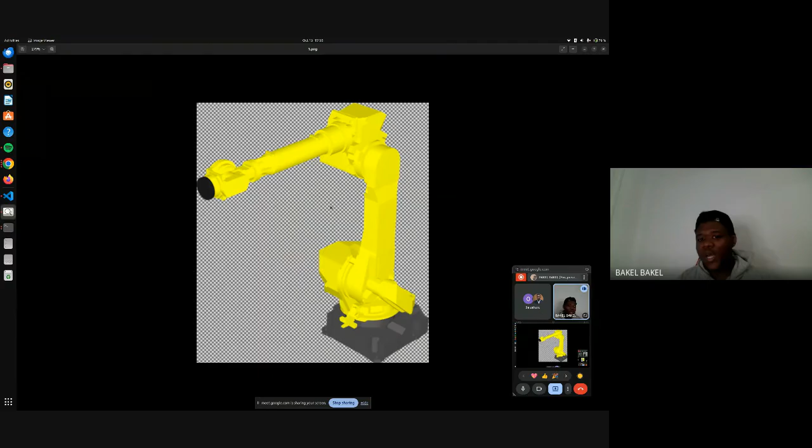And then in the final results, we have two things to guide us. We have this picture where we have what it looks like. Then we also have this particular picture. With this, you can have a rough idea of where what goes, right?

Yeah, what's up, Samuel? I want to ask, are those links usually named link 1, or could they be named something else? Okay, so let's look at the conventions. This one was named finger, hand, link 0, link 1 through link 7. This was named arm link, base link, forearm link, lower wrist, shoulder, upper wrist link. This is exactly how they named it. This was link 0, link 1, link 2.

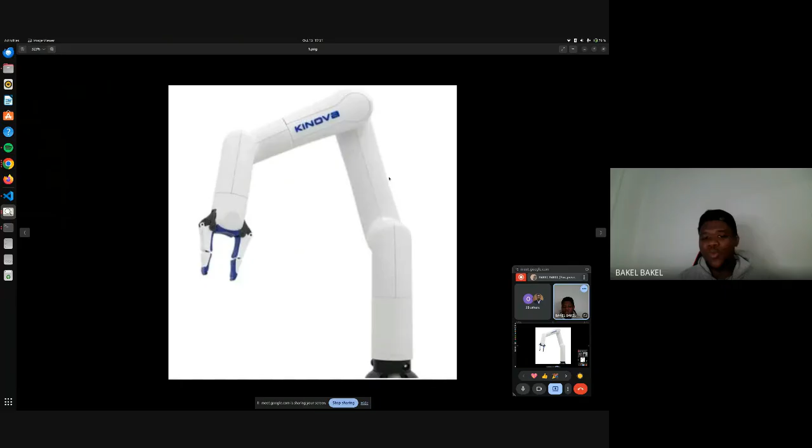But either way, provided it's a robotic arm, it's easy to use your intuition to know where what goes. In the event that you do not know, there's always the final result. They designed it, they know what it's supposed to look like. So you would look at the final results, look at what link you are working with, and then you can tell where what goes. At this point, it's more like putting the puzzle together. But again, that's what makes it fun.

So you see this link here, this link here, and then you probably see this one. And then you now have this guy. So it's left for you to figure out how they actually come together. And the funny thing is, that figuring out is usually part of the problem. Already, if I zoom this part, you can see that this point up here is this one. You can see this arm here.

Now, just on a bit. Now, why am I not using the proper CAD software? Again, I only use CAD on gunpoint. So there's somebody on this group that likes the CAD part of robotics. No, that's not what we do. We either do software or hardware. We don't do CAD. So, do I have CAD software? Yes. At times you might have to do some CAD.

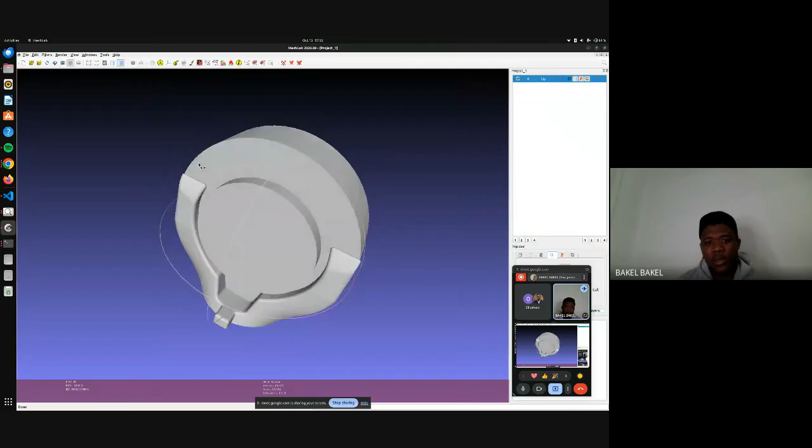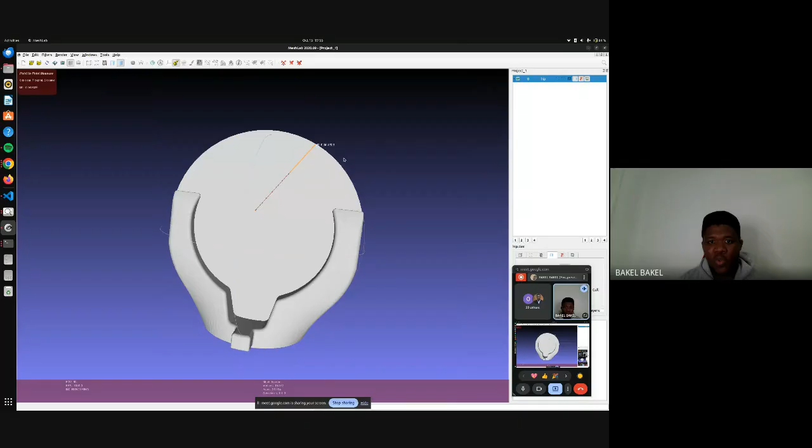It's not like I need this for anything, but as we go on, you would find out that at times you might want to make measurements, to know where what is. It's something you would settle into as time goes on. You would want to measure from maybe this point to this point and know what the measurement is reading. There are different reasons you might want to measure, but I will show you why you would need to measure at some point.

Yeah, the measurement even shows here. That's why I like the terminal open, because almost everything you do in the GUI shows on the terminal. There's some Chinese in it. Okay, that's extra stuff. Now let me put this in the part here. Okay, so what tools should you have beforehand?

If you have SolidWorks, perfect. You don't need to get SolidWorks. I don't have SolidWorks on this PC, so I use MeshLab. And how do you get MeshLab? sudo apt install meshlab. You can choose to put -y, that's optional. sudo apt install meshlab should do the trick for you. And I would probably want to bash this. What tools should I use? Number 1, MeshLab. Number 2, yeah. So just bash this.

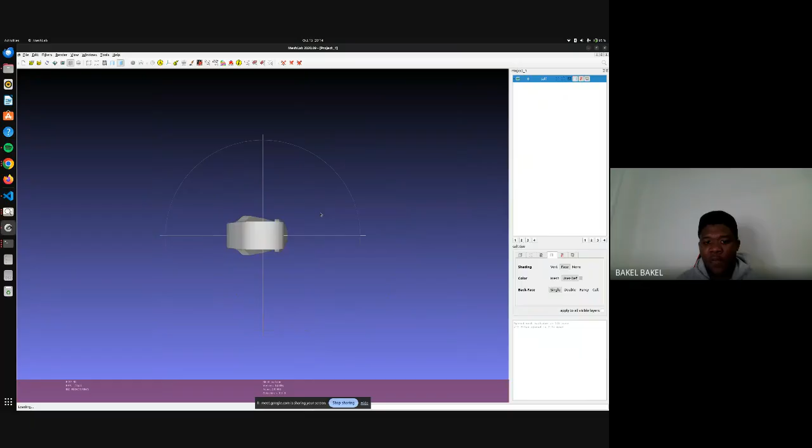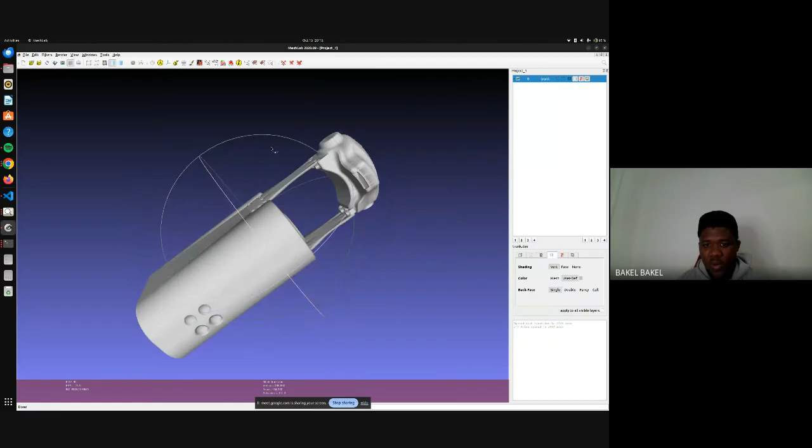You can see what I'm doing, I'm just looking around, seeing what it looks like. This is the trunk. As you can see, all this was already done by the CAD guy, and they stripped away everything. There are no electrical components because we don't need them. We can simulate every single thing, like motors. All we need is what it looks like.

Yours will not be with the dog, yours will be with the robotic arm. The problem is if I solve one robotic arm, the other robotic arm becomes easier for everybody to solve. So just try and adapt what I'm doing. Okay, so you inspect your mesh just to get an idea of what they look like. Now, if for any reason you want to tamper with the mesh, feel free. I won't stop you.

Now, the next one, please write the code for checking the mesh. The code for checking the mesh depends on what you're using. I'm using MeshLab, so if you want to use MeshLab, you must make sure you've installed it. Let me go to 7. If you want to use MeshLab, this is what you do: you install MeshLab, and then you do meshlab link.dae.

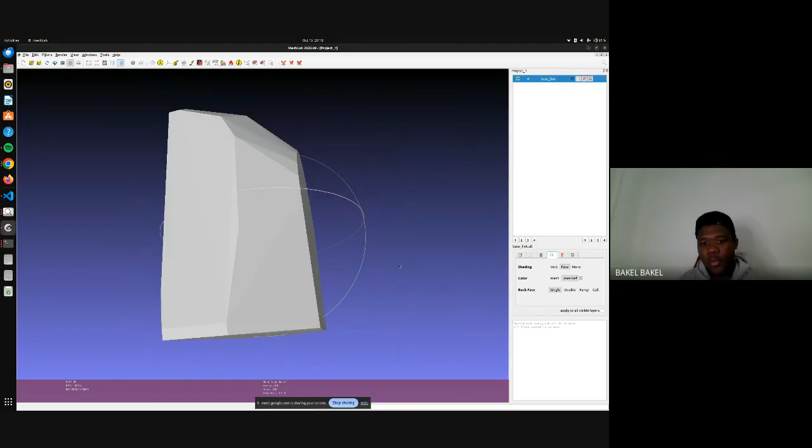So yeah, meshlab link.dae, or it could be link.stl, whatever. Okay, so the eighth one is you've inspected.

I once inspected an STL that took 5 minutes to open, and I sent it back. They have to actually reduce it. I can reduce it, but the reward for good work done is more work, and I wasn't being paid for that. They have a CAD guy that can do that, so I just sent it back.

Yeah, that's something you need to know about work culture. If you are good at something, you don't do it for free. But I mean, there are times you do it for free. But if you are good at something, you draw boundaries. Else, they will overwork you, and it's everywhere. It's every single place, and it's something I suffered a lot. So I decided, nah, I'm not suffering that again. So I just send it back.

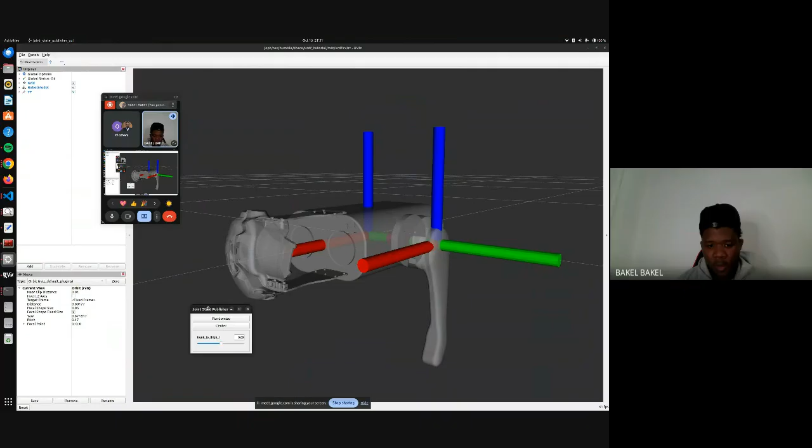And what do we now do? Well, we now run it and hope it works. It should work if I've not skipped anything. Okay, it works. And now you see you have 2 axes, right? Let me make it bigger. So we have this, and now we have our controller here, and we can move it because we made it revolute, not fixed, so we can move it actually.

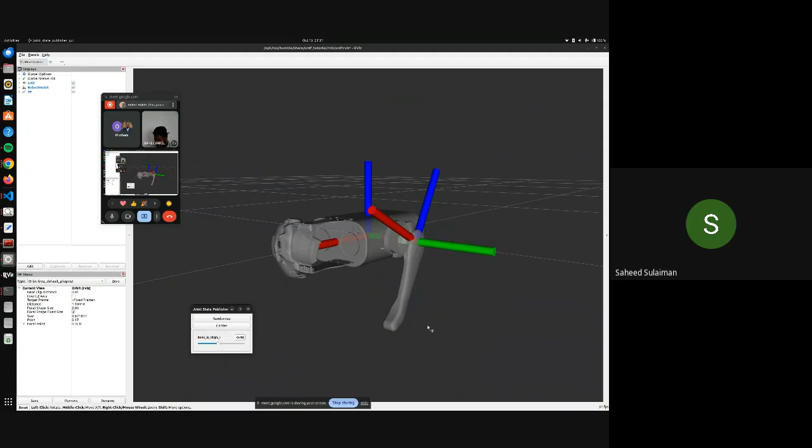And then, sorry, what's up? So did you create a launch file to launch this, or how are we going to launch it? You know about launch files. I could create a launch file, but I'd rather not, because there's already a launch file I can use. There's a launch file in URDF tutorial. Remember, this is the command we're using to launch it.

Let me show you something. We are using ros2 launch. Now, technically, if I wrote a launch file myself, I would write dog description and then the launch file, maybe launch.py, whatever the name of my launch file is. But I didn't write one, because if I write one, I have to teach you how to write one. So we can start by using what's already available before we narrow things down.

And there's a launch file somewhere. Where is that launch file? It's in my computer. It's in opt. It's in ros, it's in humble, it's in share. Now in share, it is all the way down here in this folder. Launch. This is the launch file I'm using.

Why? Because I can literally just copy this and make my own launch file. But why do that when you can just reuse? ROS allows you to reuse it. So launch urdf_tutorial. As you can see, I am now using another package called URDF tutorial. Look at it, URDF tutorial down there. That's the package. And in that package, I'm using their launch file, which is display.

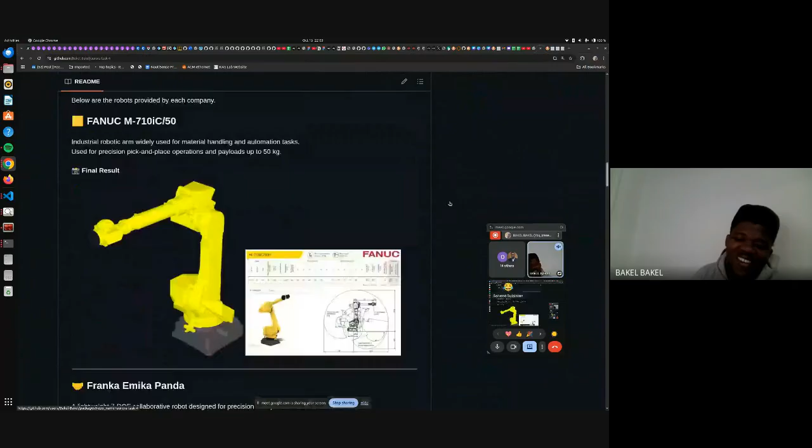Okay, so as usual, star the repo. Now this is why I say star the repo. We're like 60 something on the group, we'll be 70 something, and we are going to be more next time. If the repo is starred, you can simply come here and just come to your stars. It saves everybody the stress. Group link, repo link, repo this, repo that. I've seen someone that had the repo but lost the repo. Just to make things organized, so we're not looking for the repository link every time. So yeah, let me drop the repo link.

So you come to the repository and you can see here. If you read everything here, good for you, no wahala. But this is to make your life easier. So you click on it, and this is what we worked on. Anywhere you reach, upload something. Let me head over to get the link.